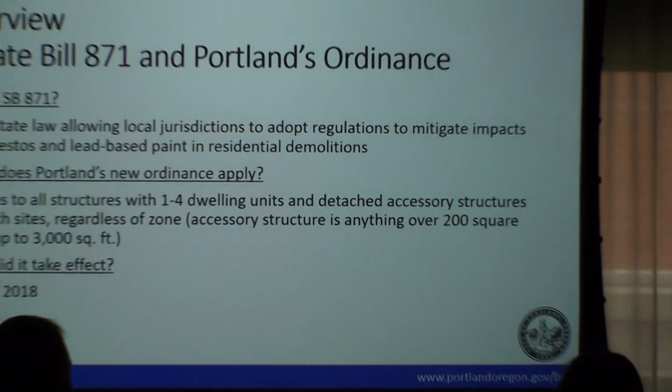Thank you, Elliot. Okay, so starting off, you'll hear the term Senate Bill or SB 871. That just refers to the law that the state passed that allows local jurisdictions like Portland to adopt regulations to mitigate the impacts of asbestos and lead-based paint in residential demolitions.

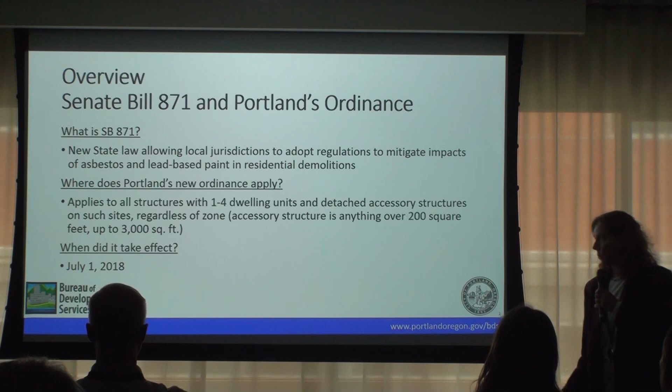So Portland adopted our specific ordinance, and for us it applies to all structures with 1 to 4 dwelling units and any detached accessory structures on the sites, regardless of the zone. That's a little different from some of our other residential demolition notice requirements, so we want to make sure everybody realizes that even if you're on a commercial site and it's a single family, these requirements still apply.

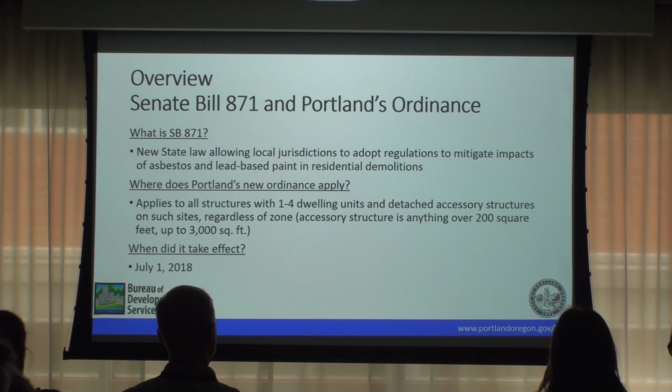We're using the building code definition of accessory structure, which is 200 square feet to 3,000 square feet. The requirements also apply if the only thing you're demolishing is that accessory structure. These regulations took effect July 1st.

The general requirements are, first, that you have to designate a demolition manager. That person is responsible for overseeing the project. You also have to have a demolition plan that does dust and site control. This is really high level - Jeremy's going to go into the specifics, so I just want to give you context before we go into it.

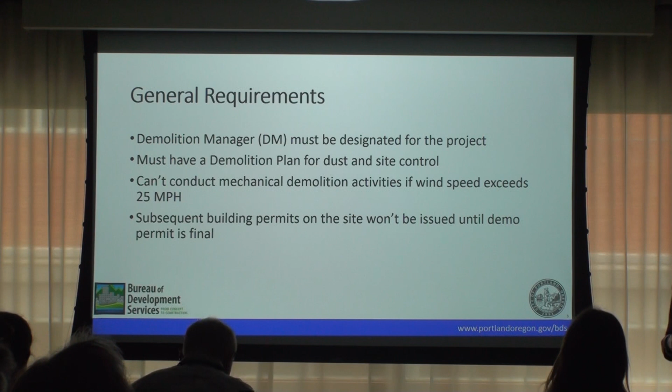You can't conduct any mechanical demolition activities if the wind speed's over 25 miles an hour - that's basically if you're using heavy machinery. And then you can't get a subsequent building permit on that site until the demo permit is final, and that's a very different process from what we used to have for this.

So the demolition manager is designated by the property owner. That person is basically BDS's contact person, and they're responsible for implementing and overseeing the project. They have to either have the required asbestos certifications - accredited inspector, certified worker, or certified supervisor - and they either have to be on site during all of the mechanical demolition and deconstruction activities, or they have to designate somebody with those accreditations to be on site.

And there is an exception we'll talk about later - you don't have to do that if you've done a comprehensive asbestos inspection and testing and you've done that abatement. We put that in because there was some concern that having to have somebody on site the whole time wasn't really productive if you could show that you've done full testing.

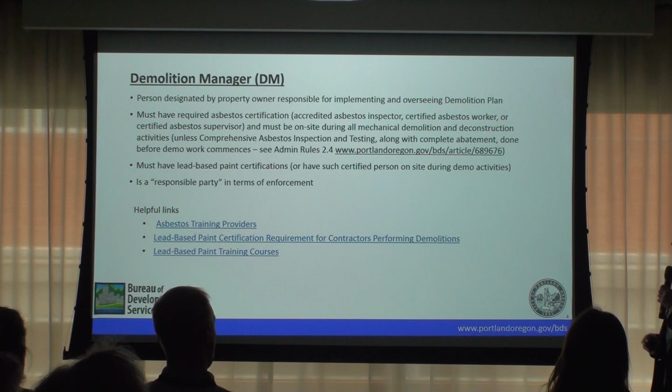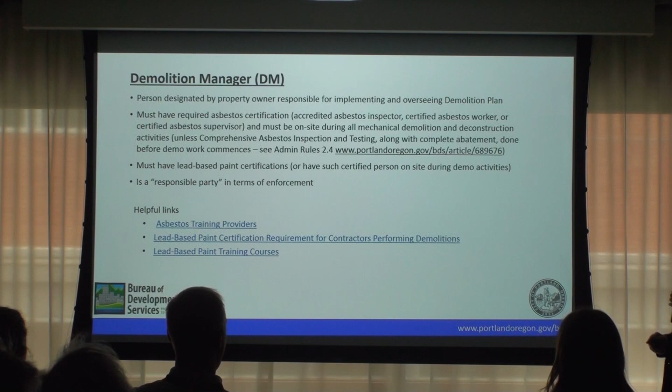The demolition manager also either has to have the lead certifications, or again, that certified person has to be on site. And this last one is key: they are a responsible party in terms of enforcement, so they're really going to be one of the main people we look to for enforcement on this.

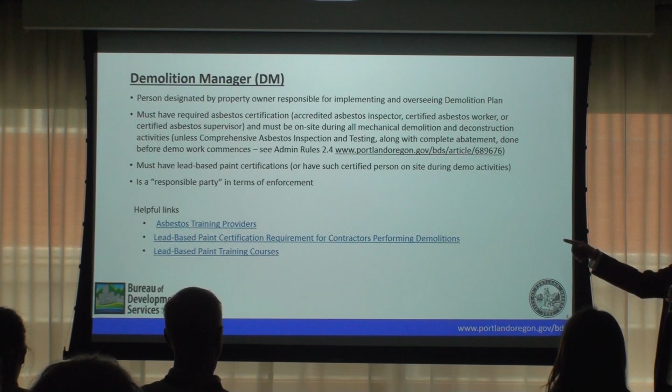This PowerPoint will be available on our website, and these links will take you directly to some of the information on these asbestos and lead-based paint certifications.

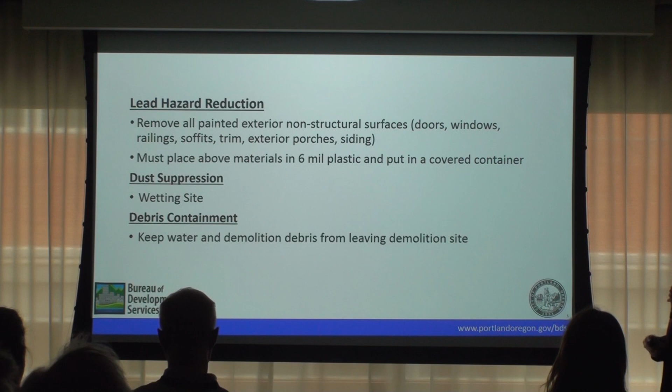The key components of the ordinance are lead hazard reduction, which is basically removing all of the painted materials from the non-load-bearing exterior surfaces and putting them in plastic, then doing dust suppression, which is basically wetting the site, and then doing debris containment so that once you wet things, they don't go off site.

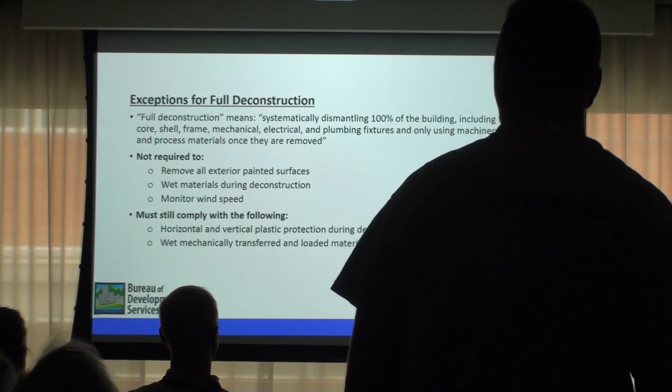There is an exception if you do full deconstruction, but it doesn't get you out of all the requirements. This is the definition of full deconstruction - I'm not going to read it, but it's there and it's in our ordinance. If you do full deconstruction, you're not required to remove the exterior painted surfaces, wet the material, or monitor the wind speed. But you do still have to do any horizontal and vertical plastic protection and wet anything that you mechanically transfer or load.

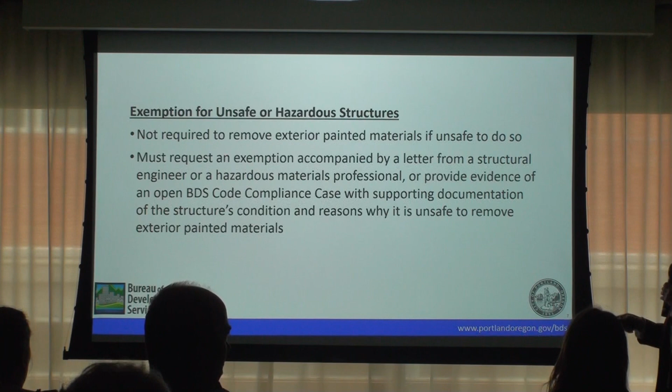We also have an exception for unsafe or hazardous structures. Sometimes the structure is in really bad condition, and we wanted to create an exemption in case that's the situation. But to get that exemption, you either have to have a letter from a structural engineer or hazardous materials professional, or you have to provide evidence that BDS has an open code compliance case, and then you have to have supporting documents of whichever one you do.

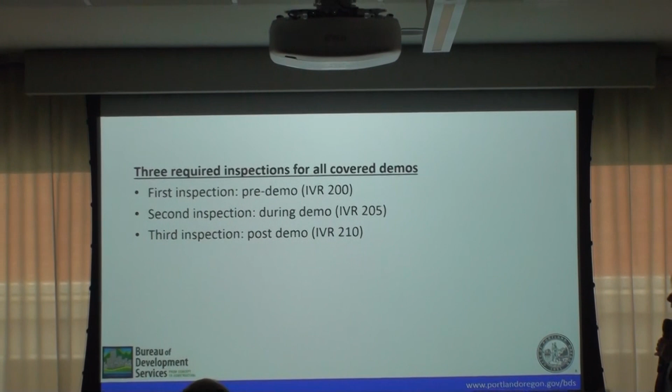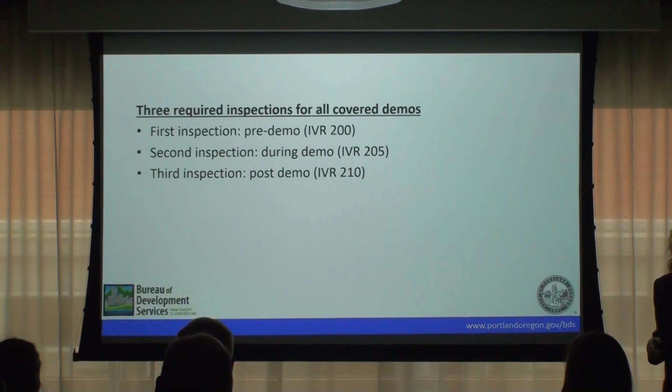And then the last piece of this that's new is, instead of having one demolition inspection, there are now three: a pre-demolition inspection, a during-demolition inspection, and a post-demolition inspection. Jeremy will go over those more. And I will turn it over to Tracy.

First, before I start to talk about the intake submittal and the requirements prior to inspections, I want to talk about new construction real quick, because I want to make sure everyone understands how this affects new construction. So anytime there is a building on a site that you're going to be building any kind of new construction on after the demolition, if Senate Bill 871 is triggered, it's important to know and plan ahead that your demo permit has to be finalized prior to the release of any new construction permit. I don't know if we're going to touch base on that too much today, but I wanted to make sure everybody was aware of that.

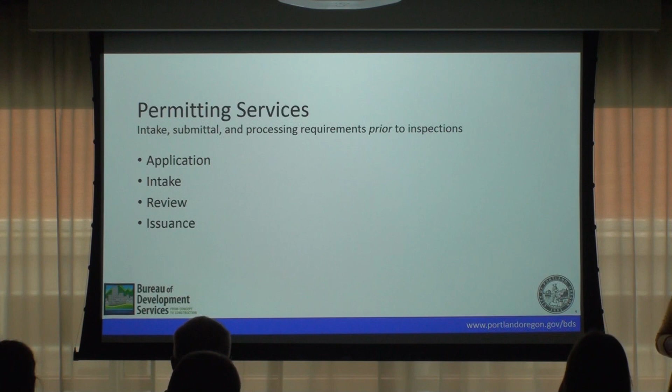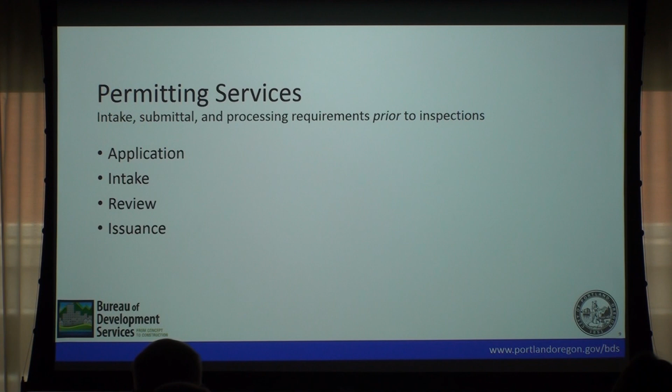Most of us are probably familiar with demo permits, so again, we're just focusing on the new requirements that have been added to demo permits based on Senate Bill 871. We're going to talk about your application - what should your submittal look like, what do you need to get it taken in, get those intake fees, and get it to the review process. And then we'll talk about review and issuance as well.

So again, if you had a chance to grab a demo packet, we're going to be talking about some new forms with the Bureau, and the demo packets have samples of those forms in there that we're going to be discussing. Again, focusing on those new requirements for when you realize Senate Bill 871 is going to be triggered on your project.

First of all, building permit application - you are also required to bring in an asbestos survey. Asbestos survey cover sheet needs to be included, and that's a new form that we'll be taking a look at in just a moment. That's been created by BDS. Demolition plan form, again that's another form that Jeremy will be going into detail about what we expect to see on that form, but the form does need to be completed. And then your four sets of plans, scaled.

Erosion control plan - if you are in a simple site, flat lot, not a lot going on, a lot of times the simple site erosion control form plan can cover any erosion control needs. And then when you're dealing with a property that has a cesspool on site, we also need to make sure you've included your on-site sewage disclaimer. Again, some of these forms are already existing.

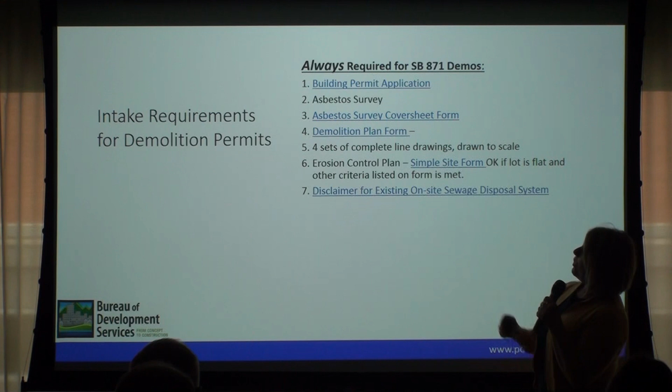The second, third, and fourth items are some of the new things that you'll see as part of Senate Bill 871.

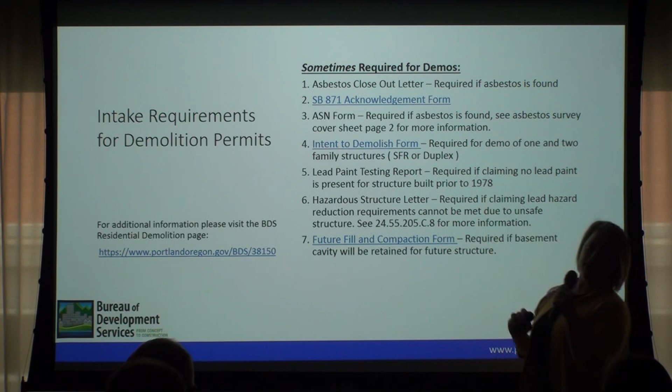So then sometimes for demolition, if it's been determined based on your asbestos survey that asbestos was found, we need a closeout letter saying what was found, what kind of asbestos. Along with that asbestos closeout letter, that would go along with your ASN form, number 3, identifying what kind of asbestos was included and how you're mitigating it.

Also, if you're dealing with a single family home and/or a duplex, you would need your owner's intent to demolish form - that's not new. If you've determined that your structure was built prior to 1978 and your structure does not have lead paint, then you need a form - your lead testing report - saying there is no lead paint as part of the building structure.

If it's been deemed that the building is hazardous, so maybe you have a dangerous building case set up with code compliance with the Bureau, or you have a letter from a structural engineer or certified inspector saying it is dangerous, then the requirements with lead paint are waived. Some of those requirements, and Jeremy can get into more detail on that.

The future fill and compaction form is, again, if you have a basement and you want to retain that cavity because you're going to come back and build a new house on it, then you would supply that form also. Remember, when you're taking down a single family home and there's a basement you want to retain, that's only if you're going to build another single family home on top of it. If you plan on building a commercial apartment building, this form does not cover that.

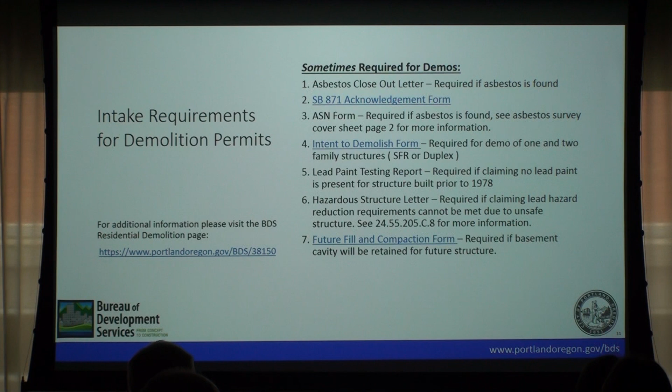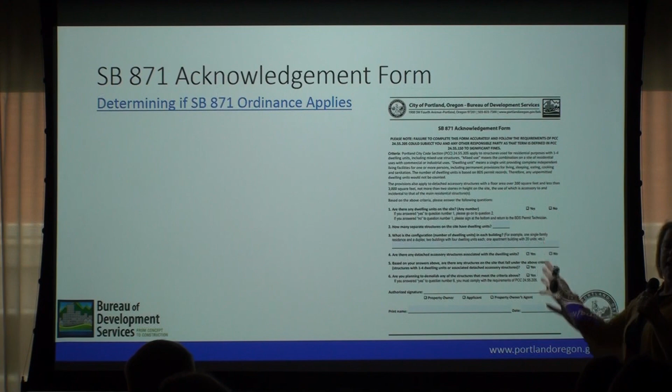Finally, if your demolition project does not trigger Senate Bill 871, we're going to make sure you also submit your SB 871 acknowledgement form. This is what your SB 871 acknowledgement form looks like. It's important that the second screener makes sure this is filled out, because this is how you're telling us that it's not triggered. That's part of the packet as well.

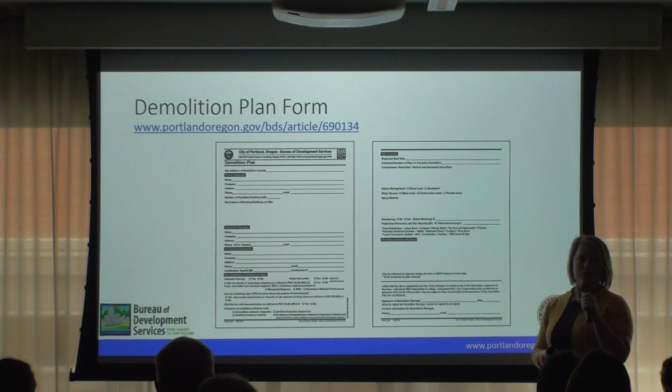This is your asbestos survey that you have to submit, and this is your asbestos survey cover sheet. And this is your demolition plan form. This needs to be completely filled out, including your narratives. Jeremy will go into more detail on what some of the things he expects to see on the form.

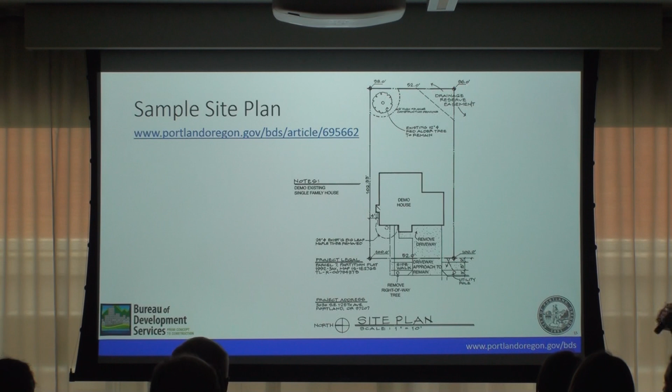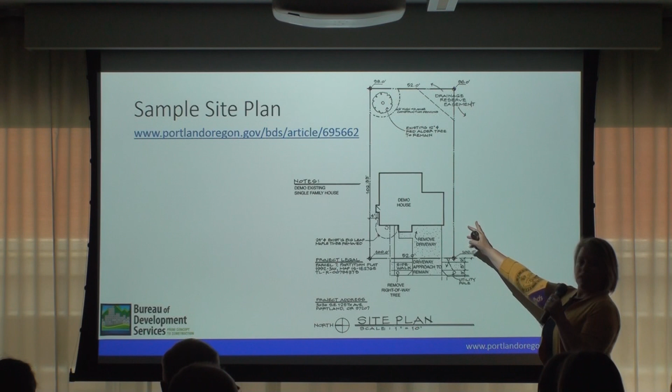Just your basic site plan. It's important that you have a scale site plan, your corner elevations. We want to know if you're on a sloped lot, where the house is on the lot, and what kind of existing buildings are on the lot, as well as the building you're taking down, or if there are any other buildings on adjacent properties close to the property lines.

And now I'm going to hand it over to Elliot. We'll talk about notification.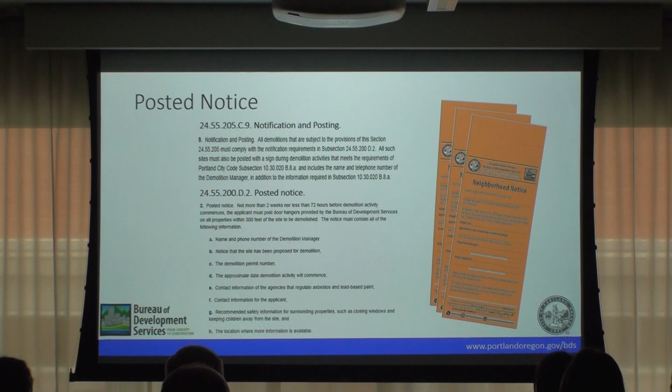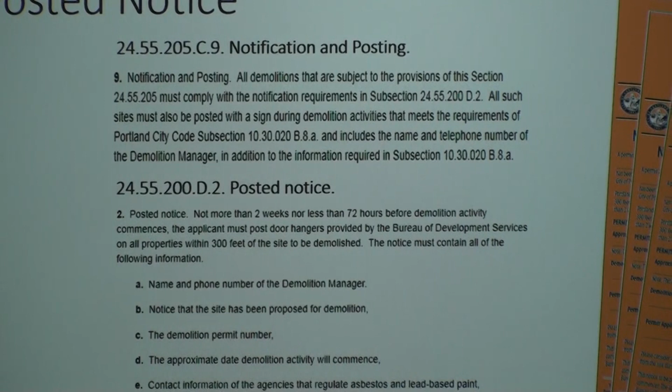After the plans are taken in for review, there's a couple things that'll happen in short order before inspections get to their demo plan review. Generally this happens the next business day or the day after we take the plans in for review. Posted notice is one of the requirements that's always been present with the demolition permit in the city of Portland. The language has been cleaned up a little bit and clarified, as well as increased in terms of the posted notice requirements for demolition permits.

We're going to make it a little bit simpler to understand, because instead of having a relative map of where you post the door hangers in relation to the property, you need to post them within 300 feet, and that's an absolute measure.

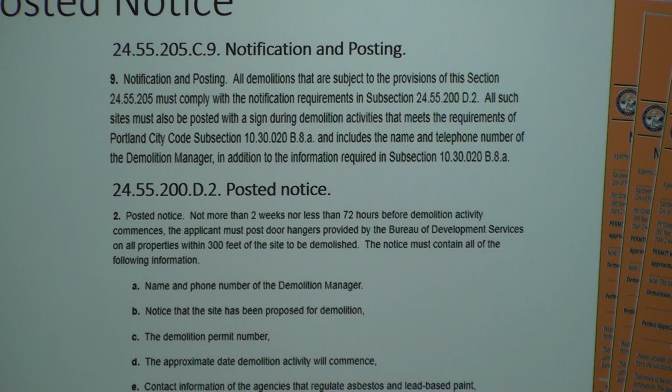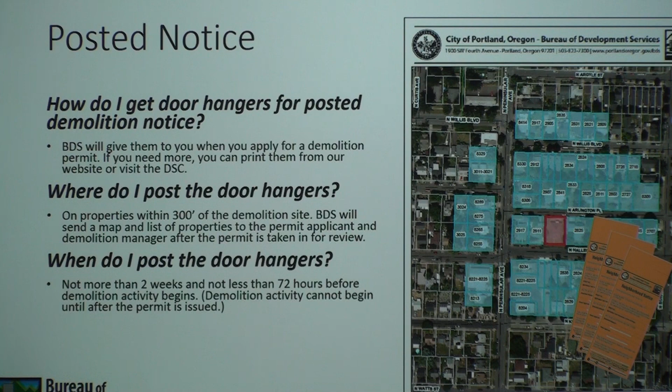The day after we take the plans in for review, you'll get an email from a permit technician with a couple attachments. We'll refer you to the code you can reference about what the language is regarding your posted notice requirements. We'll also provide you a map of where those properties are within 300 feet, so you're not guessing and trying to take a string from your demo site to measure exactly where you need to put these door hangers.

We'll give you 75 door hangers when you first get your permit set up when you walk into the permit center. If there happen to be a lot of smaller properties caught within 300 feet, you can come back to the permit center at any time to grab more, or print more from our website. When we send you that email the next day, there will be a link to the door hangers so you can print more from home if you want.

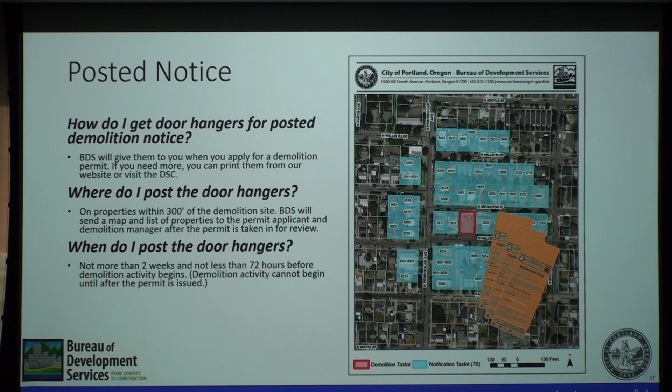The timing of when you post the door hangers is important. There's a particular time window associated with posting relative to when you actually start demolition activity. Jeremy or other inspectors visiting the site will follow up on that when you call for your first inspection. So don't post these as soon as you get them handed out when you set up your permit, in case it goes over that 2-week window for when you're actually starting activity and site prep. You're probably going to hold off and post closer to when the permit's getting approved to issue, to make sure you don't have to post a second time.

The other thing that happens after we take the permit in for review is the asbestos survey gets scanned and posted online. Typically for most permits with BDS, documents aren't available and scanned until the permit process is complete and they're all approved sets. The asbestos survey is something we're going to post as soon as it's dropped off and comes in for review, so the public can view it. You'll navigate from portlandmaps.com to the permit number or property address, and on the permit detail view, if you scroll down you'll see the documents link. If you're familiar with Portland Maps, you know where to find it, but it'll be down at the bottom of the list.

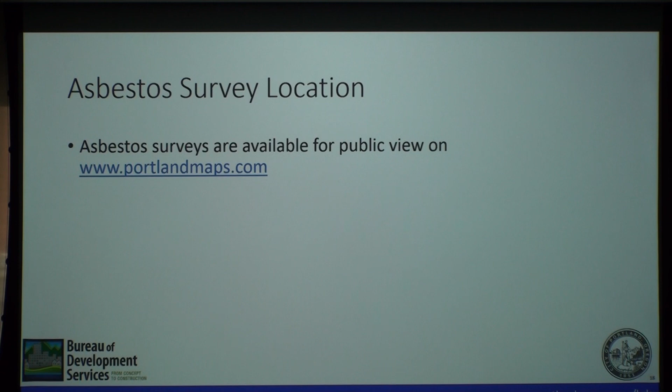Those are the things that happen right after intake, and then you'll have some other intake reviews. It might be more than just Jeremy, but Jeremy's going to go over the site controls plan review check that's new with SB 871.

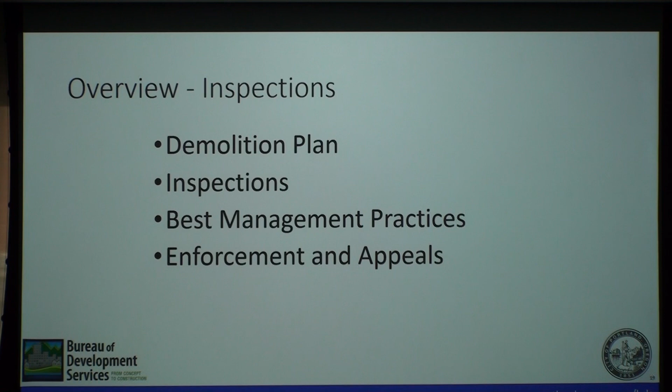I also want to introduce some of our site development team that will be doing inspections that you'll be working with. So Shiklon is here, Chike, and Derek. I don't know if Derek made it back from inspections—there he is, hi guys. And absent is Jason Vinci, he's out on paternity leave, but he'll be back. So these are the people you'll be dealing with on inspections.

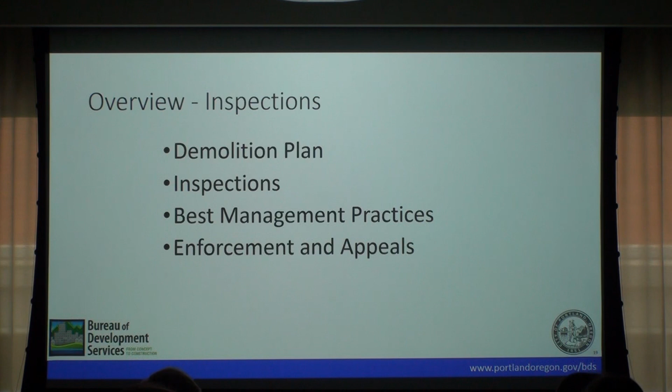So the first thing we're going to go over is the demolition plan. We are constantly improving this process and these documents. So the demolition plan, we're going to be filling in these blanks. And the one thing we've been seeing is there's a lot of blank permits coming in, a lot of blank plans, and I think that's just based on us not giving enough information as to what we expect to see. So we're currently redlining and updating that. I worked on that this morning.

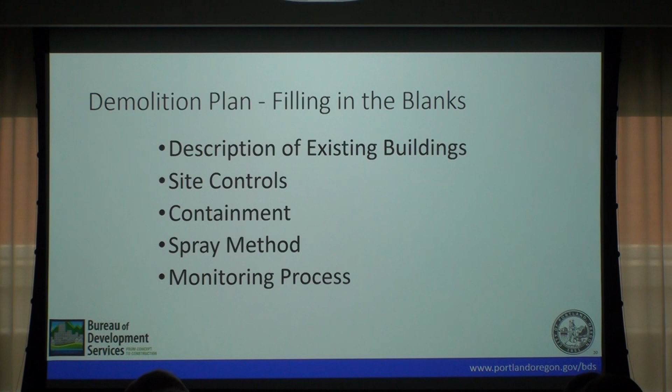So if you struggle with that, we're addressing it. We expect to see the description of the buildings, like we talked about earlier, the site controls that will be on site, the type of containment that's going to be needed, the spray method, and the monitoring process. This is the actual form, so we'll have the permit applicant information there.

When we see the description of the existing buildings on site, we want to see some information like it's a single-family residence, 2-story, 2,000 square feet, and the bonus for our inspectors, because we'll be using this plan to do that inspection, is there painted wood siding? Is it brick? Is it painted wood frame, windows, and doors? Those are things we're going to be looking for on site.

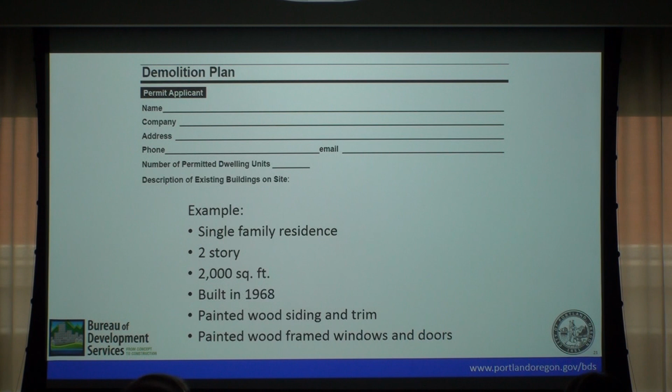Site controls: expected start date. We see a lot of these coming in that say the expected start date is the day that they put in the application. That's not going to work. You should plan for the review time, and you should plan for at least your 3 days of posting time for that as well.

The containment—so what we're looking for on containment is the lead hazard reduction. This is the plastic that you're going to lay down on the ground, either horizontally or go vertically with the plastic if you can't get your 10 feet between the property line.

So what we'd like to see here, for example, on this project, we would say the east, west, and south property line is greater than 10 feet between the structures. So horizontal containment is fine, and we're going to use non-woven geotextile for that, or a 6 mil plastic. That's the kind of information we want there.

The north perimeter, though, this structure is too close to the property line, so we're going to have to do horizontal and vertical containment on the north perimeter. So in this example, we're using row cover.

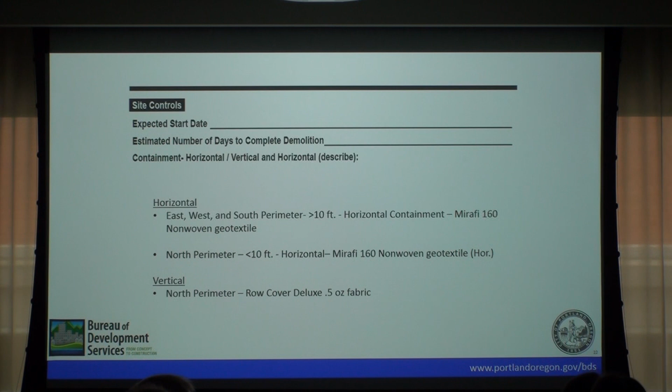It's a deluxe, very lightweight fabric that you can easily put up, staple to the studs, or put up on top of the building. And we want to know that when our inspectors come out, they're going to look at that plan and say, 'Are you doing what you said you were going to do in your demo plan?' Small changes are fine, things happen, but this is going to help us speed up the inspection.

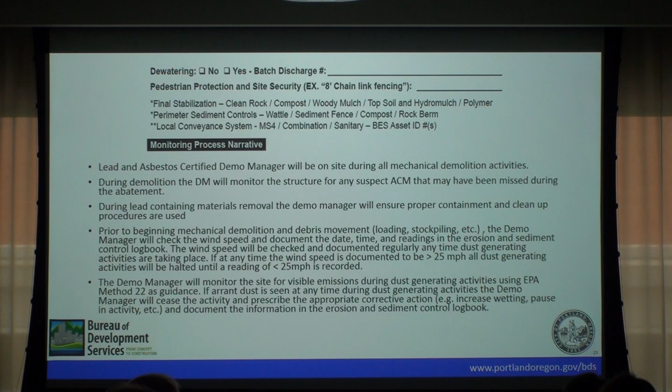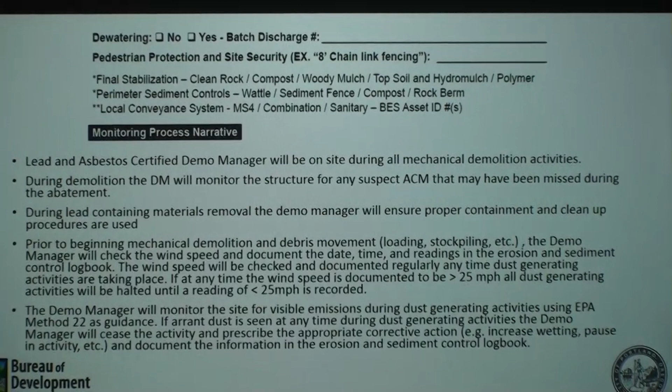The dewatering. So anytime you're going to discharge—this is a current rule, this isn't new—if you're discharging from any project into the right-of-way or into BES's assets, which is catch basins and lines, you need to have a batch discharge permit, especially in this situation because we're dealing with lead and other pollutants. They may require some filtration if you have to pump out into the right-of-way or to our system. So if you are going to do that, you're going to have to contact BES, get a permit, and provide us with that permit number.

Pedestrian protection is required when you're within 4 feet of where people will be walking. So if you have your equipment staged within 4 feet of the right-of-way, we want to make sure those people are protected with something like an 8-foot chain link fence. Also, if you have an excavation that's that close to the right-of-way, you're going to need to do protection as well.

Moving on to the monitoring process, this is what the demo manager will be doing. We want to know what you're going to be doing on site. For example, a lead and asbestos certified demo manager is going to be on site during all mechanical demolition activities. During the demolition, the DM will monitor the structure for any suspect ACM that wasn't found during the original survey.

This is one of the key things that made this come into play, because we were seeing a lot of asbestos surveys coming in that were limited surveys. That means they just walked in, saw the material that was there, but there was no destructive search for other materials. If you've ever worked in this area, you can pull down a wall and maybe find some wiring that has asbestos in it. We weren't catching those on those limited surveys, so during those demolitions, all that material was just getting lost. So this is the destructive survey.

The DM is going to be sitting there watching to see if there's anything that they need to stop the project for and contain properly and get rid of. Also, during the lead-containing materials removal, the demo manager is going to ensure that proper containment and cleanup procedures are used.

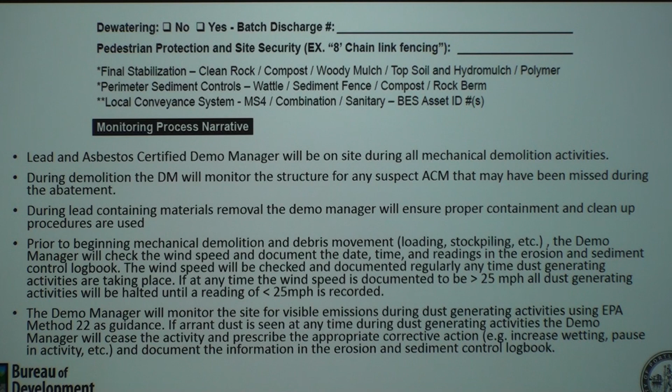So if you're a demo manager doing mechanical demolition and you notice a little bit of dust coming off the site, stop that demolition, write down what happened, and write what you're going to do to change it. This is key, because if we get a complaint and come out and don't see that anything was done, there's going to be an issue. But if you're monitoring and documenting what you're doing, that's what we're going to go to, and that you're following those procedures. So monitoring process—this is what we expect to see.

Debris management, you have a choice of direct loading or stockpiling.

If you're stockpiling, you want to make sure that you have some containment under those stockpiles, plastic, 6 mil plastic, and then you're covering those stockpiles at the end of the day.

Water source: for your wetting, you need to have either a water truck, a construction meter, which would be a hydrant, or a private meter. So we need to know where that's coming from.

And the spray method is going to be different for every project. You're going to come up with what works for your company, what works for your crews, but it needs to be effective. It cannot be a simple water hose and a nozzle. That will not work. We will not accept that as a note on this form. It's laid out in the admin rule and in the code that that's not going to be good enough, so don't turn in a plan that just says hose and spray.

But for the spray method, we want you to tell us what you're going to do. All exterior building surfaces and equipment are going to be wetted directly prior to the beginning of demolition. If you're working within vertical containment areas and you want to wet those areas to assist in dust control, that's fine, but just give us an idea of what you're going to be doing. Stockpile material is going to be wetted. Those are all the rules.

And the equipment's really important. Let us know what you're using for equipment. Is it going to be a pressure washer? Is it going to be construction fire hose with a nozzle? But the equipment, please don't cut and paste from this. It's not going to be the same for every project.

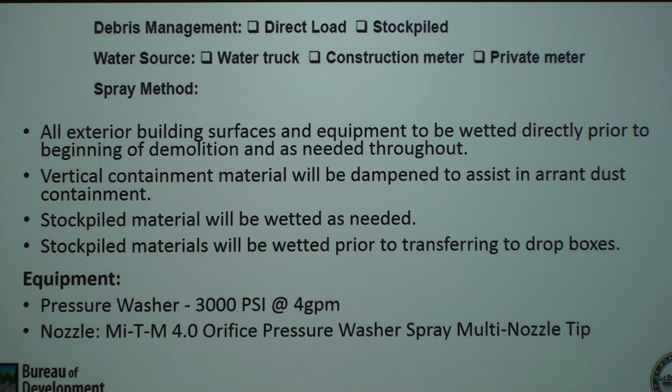The inspection process is not different than the erosion control inspections that we have now that are required for all ground disturbing activity. Same type of inspections, we're just looking at a few different things. We'll have a number 200 inspection, which is called pre-construction erosion control and site controls, an interim inspection during the demolition, and the permanent measures inspection after the demolition is done.

Yes, ma'am. So Heidi, did you want to say anything about the required tree preservation inspection that would precede any of those on sites where there's applicable trees to be preserved?

Right, so if, just like with every other project, if there's tree protection that's required, you can call that in before we start any other demolition or disturbance. So that's a number 507 inspection.

That's still an issue on just regular construction sites. So on demolition sites, let's get that taken care of first thing. Get out, put your tree protection up, call in the 507, get that approval, and then call in your 200 when you're ready to start demolition. Thanks, Jill.

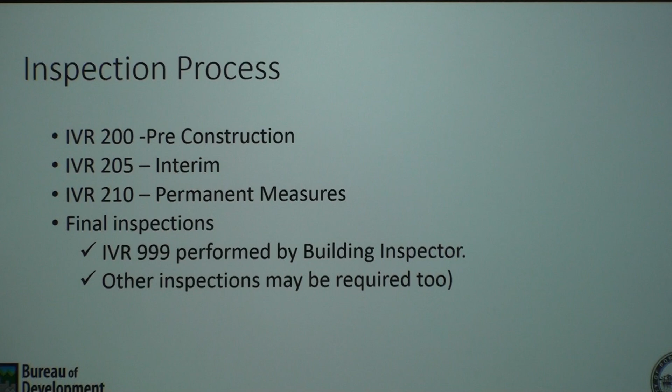So the pre-construction inspection, what we're going to do is, you call this in for the day that you expect to start. The morning that you're ready to go and your crew's on site, this is when we should be doing this inspection, not 3 days prior. We want to know that the measures that we're requiring are on site and ready to go, and the process is going to be followed that day. When we walk away from this inspection and give you approval, we're expecting that demolition is going to start right away. So that's the appropriate time to call in this inspection.

So what we're going to do when our inspectors come out, we're going to review the demolition plan with the contractor and the demolition manager, and we're going to make sure everybody's on the same page as to what you said you were going to do. That's what we expect you to do.

Erosion and sediment control measures should be in place, and if you have questions about those while we're there, we can go over that and give some guidance on what we need to do. The same requirements apply for these demolitions: catch basin protection, perimeter controls - those are all still required, nothing different there.

We're going to photo document the inspector's or the credentials of the person on site. You're going to show us your lead certification. You're going to show us your asbestos certification. We're going to document those and put them in our system so that in the future, if we see your name again, we already have your credentials on file. Trying to be smart about all this.

We're going to review the simple site form, again erosion control. We're going to ensure that all the initial site controls are in place and that the items are going to be inspected. We're going to be looking for the erosion control, the wind speed meter - we want to see that in your hand. Watering and dust suppression system.

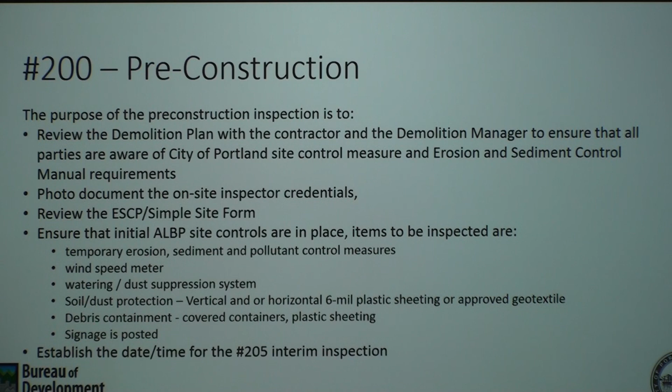It may take us a day and a half to get this thing through, so we're going to come back midday next day and just make sure everything's going okay, make sure everything's being followed. We may check in with neighbors and say, have you had any dust problems? But that's the reason for that 205 - during the demolition, making sure everything's going well.

And again, it's not just to bug the contractors, but also to know that what we need to approve on for our inspections and our forms and our requirements.

During the interim, we're going to make sure that the demo plans are being followed, that you're monitoring the wind, all those requirements are being met. We're going to ensure that erosion control plans are being followed. We're going to verify that any contaminated materials are properly contained - that would be wrapping and putting in a dumpster or drop box. We're going to verify the appropriate corrections and revisions are being made to the erosion control plan.

Things change a lot on sites. You may be able to get a piece of equipment in one way that disturbs the soil, then the next day you're not going to be in that area. So you may need to apply some type of erosion control to that area after you've made that disturbance. We're making sure that things are being phased in and followed as required.

Can we do questions? Yeah.

We verify that the responsible party is conducting and documenting your inspections and your processes. If something went wrong, we want to see that deficiency noted and what you did to correct it. It's a pretty simple process, the same as the erosion control requirements currently.

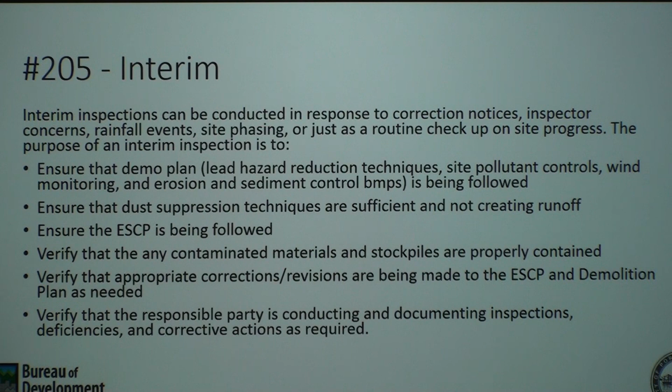The permanent measures inspection, project's over, we're coming out to make sure everything's been cleaned up, removed. We'd like to see the drop box offsite, but that's not always the case. At that point, we just want to make sure it's covered and it's not going to be leaking and taking on water during our rainy season.

So all temporary lead hazard reduction BMPs have been removed, so your plastic's cleaned up. All the public discharge points are clean, and all site debris has been removed, and also all exposed soil is covered with some type of stabilization. Just like with erosion control inspections, that's going to be mulch, rock, compost, something that's in our manual that's stated as an acceptable temporary stabilization.

We do have some exceptions that we can work with if you're moving directly into buildings. Say we're doing that inspection, you say we're staged and ready to go to start this next day. We can make some exceptions for moving on without having to apply stabilization. But that's going to be dependent on whether that permit is actually ready to start building on or to be issued.

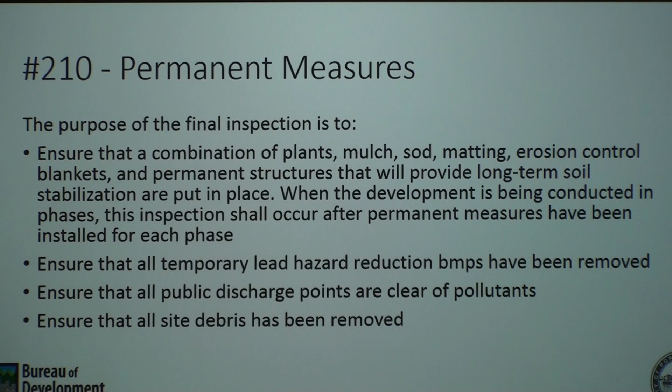So we're going to go into best management practices: signage, removal of exterior surfaces, wetting, wind speed monitoring, and erosion control.

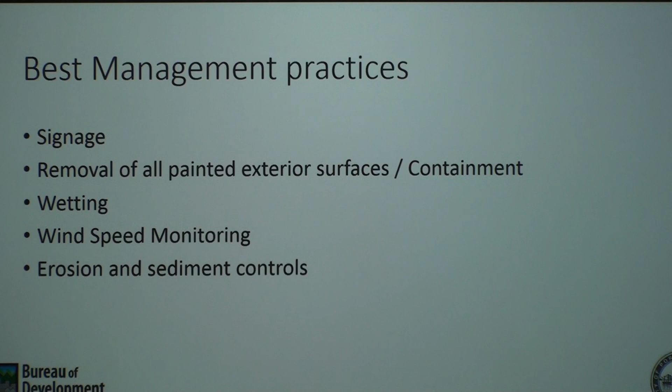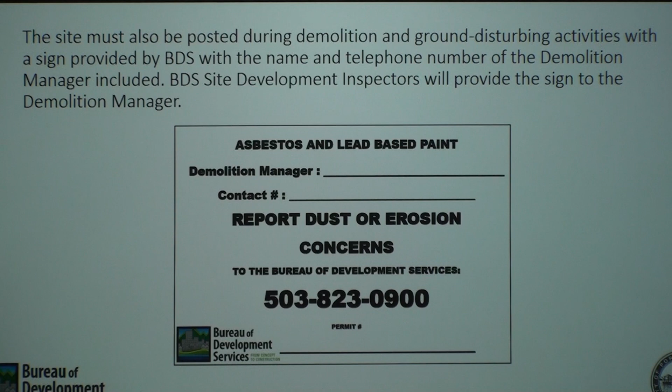So the sign must be posted. That's the example of the sign. Your information, don't just post the sign, actually fill it out. We have this issue with erosion control signage right now. It just gets posted, nobody puts in the permit number. Here's the reason why those spots are there. Put that information in, please.

So, removal of painted surfaces. It's a good example of what you might see if someone chooses to wrap every individual plank that they're taking off, or the materials. They would lay it out on plastic, tape it up, burrito it, put it in the dumpster or drop box, and move on. The other option is to just line your entire drop box and put everything in there, then wrap that material at the end of the day. So that's what we're getting at there.

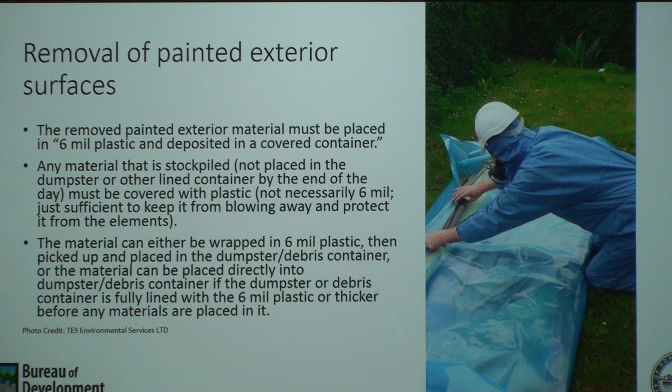The horizontal containment, this is what we're going to look for. This is what we expect to see in place at that 200 inspection.

Now in our code, we do allow for geotextile to be used instead of 6 mil plastic. We had some concerns during the draft meetings that the plastic may get slick during the wintertime. It's not safe, so we did go ahead and make an exception for geotextile. But when you're choosing geotextile, you want to make sure it's a non-woven geotextile, and that it also has some type of separation and containment. We think that's going to work because honestly, when we look at this plastic in our wet weather here, you can imagine we're containing and catching everything on the plastic, but then it starts to rain and everything just runs right back off. So hopefully we can start getting some details drawn up, and once we see what's working and what people need, we can start having a standard detail. My idea would be to provide straw wattle or some type of compost berm around the edge of this, so if we do get a rain event, that's going to stop it from running off and becoming polluted off-site.

So we'll work on that, actively work on it. But if you're meeting this requirement, we're good to go.

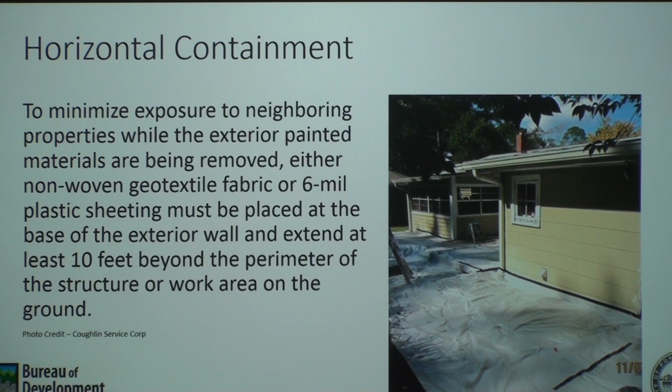So vertical containment, a lot of questions on how we're doing vertical containment. Any way you want, it just needs to be effective. It needs to contain the area where you're pulling materials off the building that could possibly have lead, or do have lead. You can move this around as you go if you're doing small sections. We've had a couple of inspections so far where they decided to use two extendable ladders, put their plastic on top of that, laid across the building, and just move that around the building as they work. Perfectly fine, we don't have to see the entire building, we'll see that it's being done at the 205. So come be creative, show us what works and what's effective.

The 6 mil plastic is optional. I know that stuff is a little bit more expensive, so we're exploring other options like row cover. During our classes, we had one of the guys who's been in the business for about 20 or 30 years who had a lot of reasons why he loved that row cover. Not only because it's cheap, but because when you have guys working in this area in the summertime, you're basically creating a sauna, it's not comfortable for them, it may not be safe. So the row cover lets a little bit more air come through. It's lighter weight, and if you're trying to protect landscaping, that row cover is exactly what it's made for, to let that breathe so you're not just killing all the plants during your demolition.

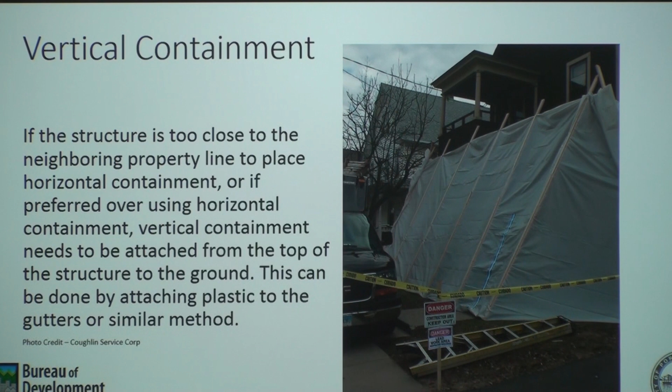Wetting. On the market, there are some products made for exterior or outside demolitions for wetting. We're not requiring anyone to use any specific type of wetting system, but it does need to be effective, and it does need to make sense that that's what you're doing.

Again, if you're doing a 2,000 square foot house, we're not going to expect a single hose or a pressure washer to be effective.

So you want to think about things like the atmospheric conditions. Where's the wind coming from? When you stage your guys for wetting, should they be standing on the south side of the building if the wind's coming from the north? We're wanting to protect that property line and that dust coming off.

So atmospheric conditions, the particle size. This kind of started to get into the weeds a little bit when we were writing these rules. Particle size is important, but if you're giving enough water to the project and keeping everything wet, that shouldn't be too much science, and you're not going to have to be an engineer to figure all that out.

And the angle and velocity of water flow—if you're just spraying things straight at the building, that's not going to work. Give it some time, you want to bring that dust back down whenever you hit, so get a nice angle on that.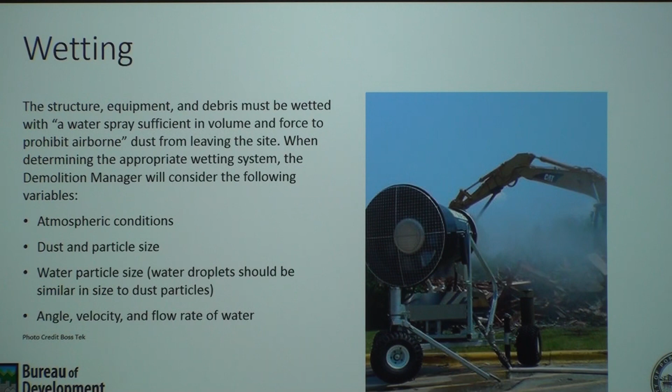And we're going to do a little video about wetting.

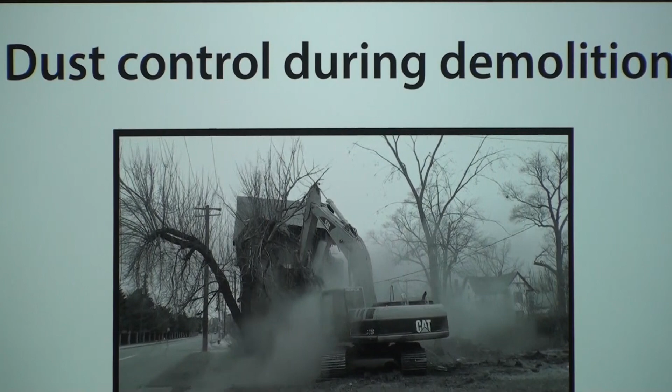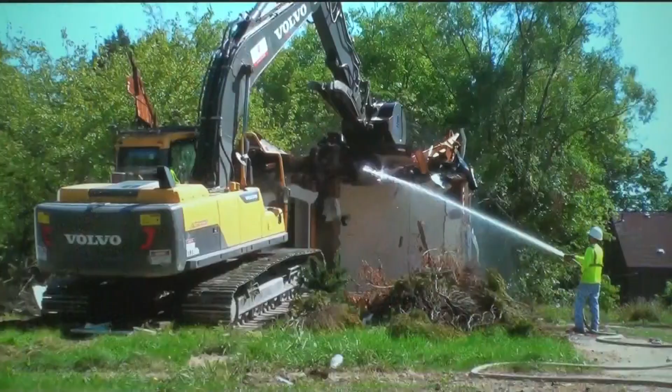As of July 1, 2018, the City of Portland requires dust control measures to be used during demolitions. These measures should be taken for all demolitions of structures with 1 to 4 dwelling units built before 1978 and the accessory structures on those sites.

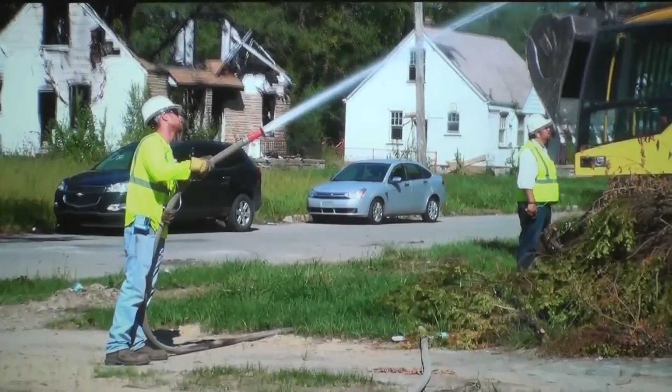This video shows an established best industry practice for the wet method of dust suppression during demolition. This practice involves pre-wetting the structure being mechanically demolished, wetting during demolition, and wetting during material loading. Other best management practices are required, so please reference Portland's City Code and Administrative Rules for specific requirements.

First, water is applied to building surfaces prior to demolition activities, as well as continuously during the knockdown phase to prevent dust generation.

During the knockdown phase, water is applied directly to the materials being crushed to prevent dust generation. The water should be dispersed from a point close to the position of dust generation in order to be most effective in both dust suppression and minimizing the volume of water used, thereby limiting runoff containing lead particles.

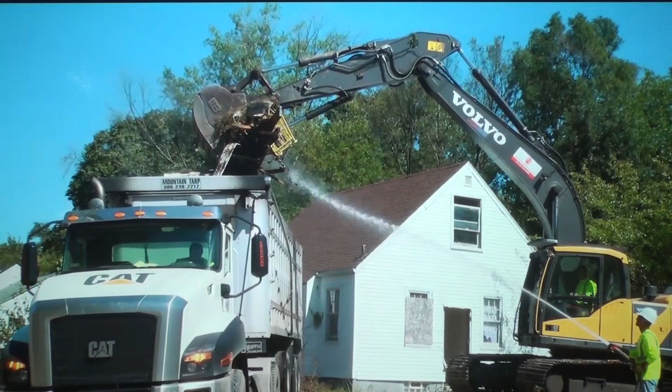Finally, water is applied to debris during handling, crushing, and loading. Ideally, this practice results in zero visible dust emissions. However, if visible dust is generated, adjust the wetting techniques to control emissions by increasing the amount of water or increasing the area over which the water is applied. The goal is to use the least amount of water possible while still controlling dust emissions.

To learn more about dust and site control measures, read Demolitions Administrative Rule 3.9 and Portland City Code 24.55.205.

Thanks to our communications team for making a nice, well-edited video. I think that gives everybody a better idea of what we're expecting to see for dust control. It was kind of a high, lofty idea that some people hadn't seen, but I think this is a good tool, and this will be available online for new contractors to look at.

I thought I got theme music.

So before we go into this section on enforcement, I just want to take a second to talk about our philosophy for enforcement inspections. I've been doing erosion and sediment control and stormwater inspections for the last 13 years, in a lot of different capacities for small towns and here in Portland.

Our philosophy on enforcement is that education should always come first. If we're not providing the people doing these projects with the information they need to be successful, then I think us as a city or as a work group, we're not doing our part of that team. So the correction notice is part of what we consider to be the first step in education.

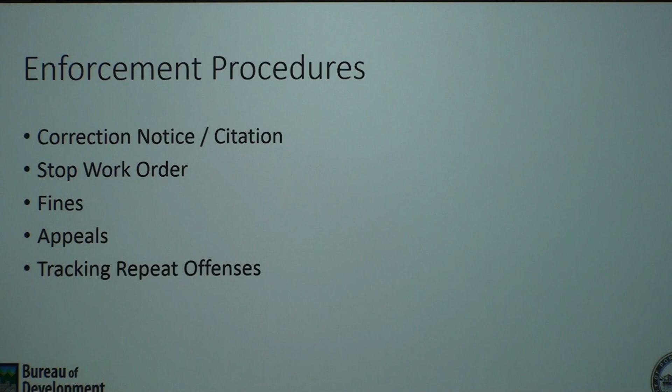A correction notice, the purpose of this is to discourage responsible parties from knowingly violating the rules, and that's the key word. Knowing and intentional violations are what's going to bump you right up to that $5,000 fine that we'll be talking about in a few minutes. But we also allow those who are simply not aware of the rules to be educated.

A correction notice will be issued to all first-time offenders. First time, we want to make sure that you know what happened, why it happened, and what the rules are that were broken that put you in this position. We also, like with erosion control, when we do these, we send out the links to the admin rule, the links to the city code sections, and make sure you have any questions. That's our job. We're not just out there to write tickets and be pencil pushers. We actually want to help everybody, and I know that's not always what people see inspectors as, but our crew, that's what we do. That's our number one thing.

So BDS will issue a correction notice stating the provisions violated. The site development inspector will determine which parties are responsible. If it's the contractor, if the demo manager did everything right but the contractor decided to do something different, we can fine the contractor. We can go back to the demo manager, or if there was an issue with the application, we could go back to the applicant. Ultimately, the owner of that property, if something happened and fees weren't paid and it continued on, will come back with liens and fees. So if corrections aren't made and the violations continue, then we may impose additional citations or stop work orders.